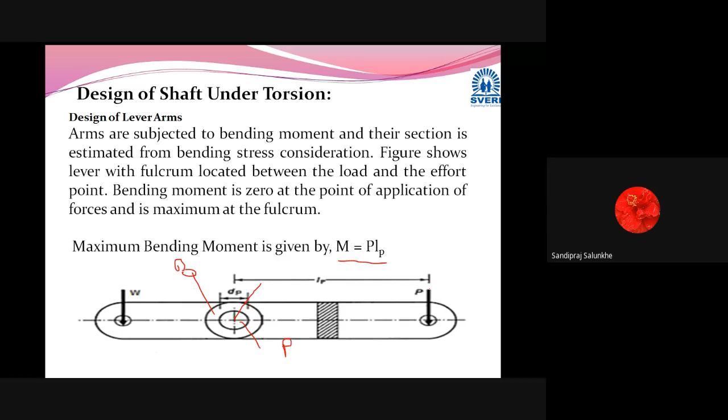If this bending stress is less than the allowable one, then we are going to say that the design is safe, in which this M is nothing but the moment which we are going to calculate, and that moment will be calculated by means of force multiplied by distance. Either this force and this distance we can consider, or we can consider the W multiplied by whatever may be the length of the W.

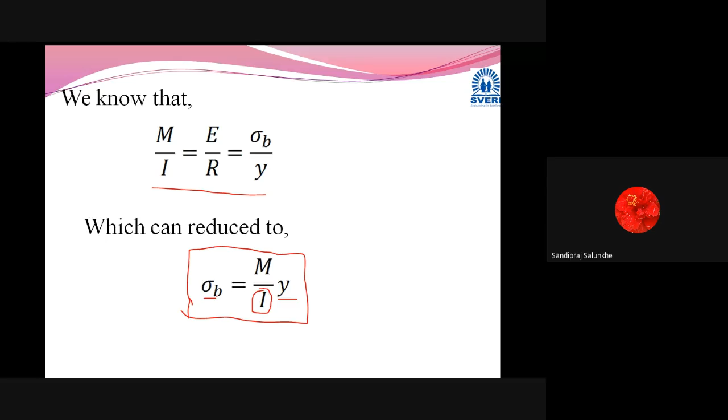And I is the moment of inertia of the cross section which we are going to consider for the lever. Already I think we have discussed which type of cross sections are used for the lever, and what are the equations of moment of inertia for that lever. Also, we know that this y is the distance of the uppermost fiber from the neutral axis of that lever. So by means of this, we are going to calculate sigma b, that is the bending stress, and we are going to check whether it is in limit or not for the lever plate, right?

This slide we have covered. Now for this slide, what we are going to consider is the values of I and Y for the selected section, that is nothing but the previous slide which we have seen. Out of this, you can choose any one section which will be given in the problem statement, rectangular or elliptical section or I section also, or it depends upon the designer, who is going to choose as per the requirement of the load or the duty of that lever, we can say heavy duty, light duty, or middle one. Depending upon that, we are going to select the cross section.

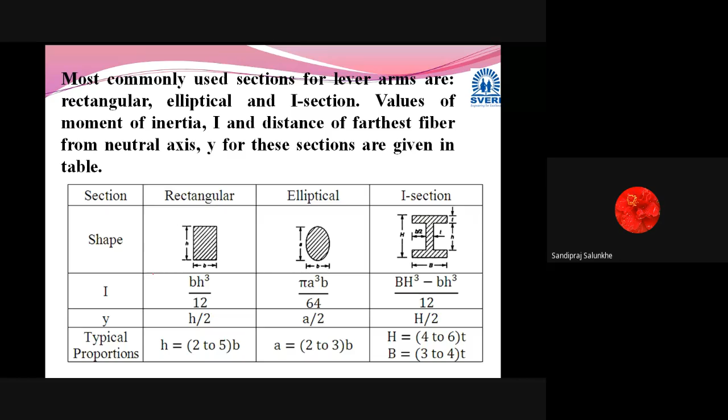So when we are going to take the suitable cross section, then this value of I and Y for the selected section is determined, and afterwards it is used for the calculation, so that the bending stress will remain within the allowable limit. By means of this I, that is moment of inertia value, and Y value, sigma B is checked whether it is within the limit or not, and if not, then we have to choose the higher dimension.

Okay, then normally when we are going to select these lever arms, when we are going to put this boss in between the fulcrum pin and the lever arm, as we are going to drill a hole there, this area is going to become weak, and as this area becomes weak, we have to strengthen it, so that the lever arm will sustain the load.

So what method we are going to use for that? Here you can see that this is the thickness of lever, we can mention this as a thickness T, but at the point of fulcrum this thickness has increased. Are you getting it? And this additional area, this one, and this one, is going to provide more strength at this point where the hole has been drilled in the lever. Okay, this is one method.

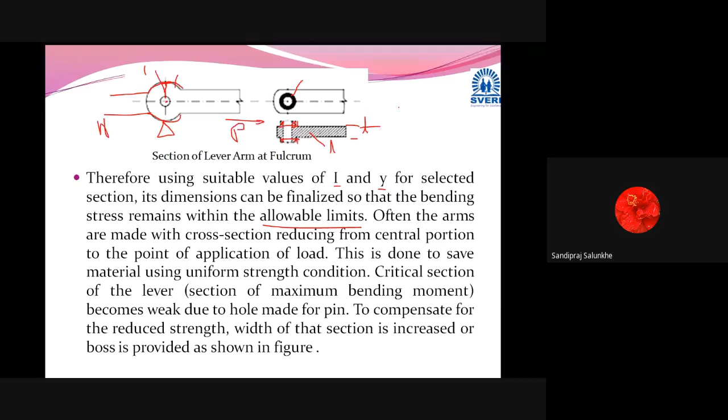Okay. Other way, you might have seen that, and here the fulcrum is used. You might have seen such type of levers. This is the effort side, P which you are going to apply, and this is the external load side W, and this cross sectional area is increased here, so that whatever stress concentration has taken place because of the drill which we make in the lever arm will get compensated with the additional area. And this is going to take the bending moment or the bending stress which is generated in the lever.

Okay, because you can see here that the maximum stress will be generated at this point only, point of fulcrum, rather than the other part of the lever. While we are solving problems, we will come to know how to decide the dimensions of the lever at the point of fulcrum, as well as the length of that lever. Length is decided by means of the leverage principle and the formulae which we have calculated. Important thing is how to calculate the reaction at this point, because further for the designing, we are going to take this reaction at this fulcrum point. Okay, this is what this slide is explaining.

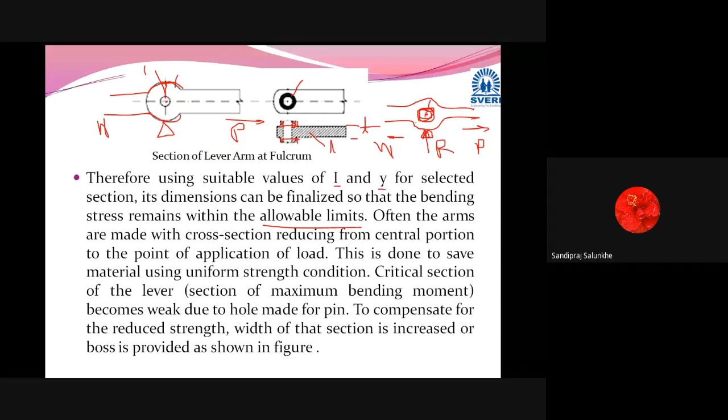Okay, the main part of this lever is design of fulcrum, because once you are going to design that lever arm, you can select the cross section and you can choose the dimensions for that lever arm. The only important calculation is how to calculate the reaction at the fulcrum point. Also, you know that applied effort multiplied by its distance is equal to the external load multiplied by the distance from fulcrum of that load.

So from this you can calculate moment, and from the moment you can use the equation M by I is equal to sigma b by y. If you select the cross section, I can be calculated and y also can be taken. This M is calculated as P multiplied by distance from the fulcrum of that P, or W multiplied by distance of that W from the fulcrum point. By this means you can decide the dimensions of that lever arm.

Now, the important point is when we decide the dimensions of this pin. Can you give me some hint where we have designed such a type of pin in a previous design procedure? In the knuckle joint, sir. In knuckle joint, right? In case of knuckle joint also, such type of pin we have designed, where double eye section and single eye section we have seen.

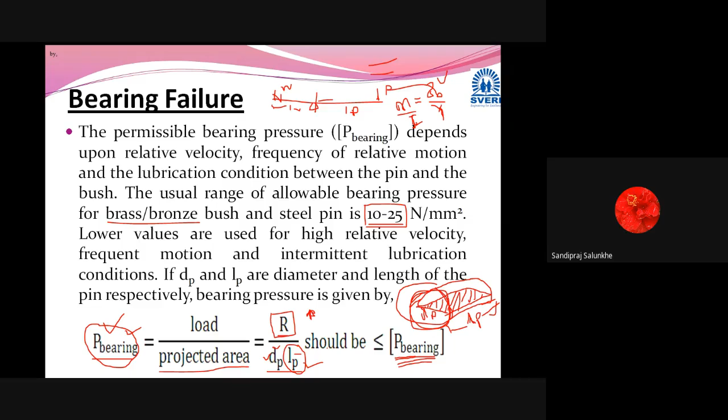No, sir. Hmm. No doubt. Okay. If you have any doubt, you can write in chat box or we'll move further. Shall we go?

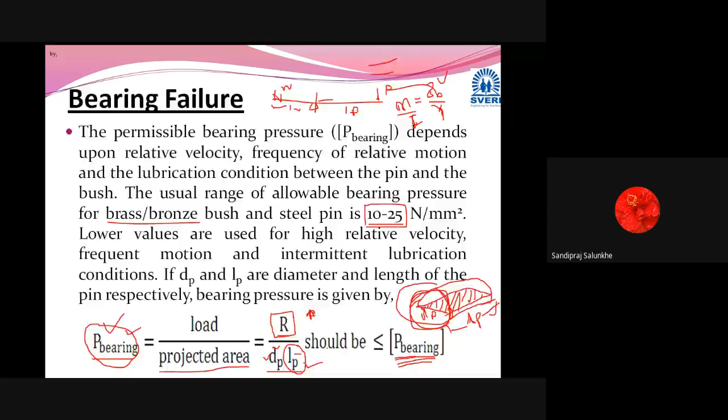Okay, now we'll go to the normal consideration, that is the failure of that pin. And we are going to calculate the dimensions of that pin. If we are going to select that dimension of pin, then we are going to check whether the shear stress which is generated in that pin is less than the allowable shear stress of that pin material.

What it means. Now here we are going to consider this pin is subjected to double shear, as already we have seen in the diagram. At this point and at this point, shearing is going to take place, and we are going to consider the cross section of pin is circular, with the diameter of this pin as dp, right? So we know that stress is equal to force divided by cross sectional area. Now the force which is coming is definitely the reaction which has been provided here at the fulcrum, which we can calculate with the formula which we have derived. This is the force situation.

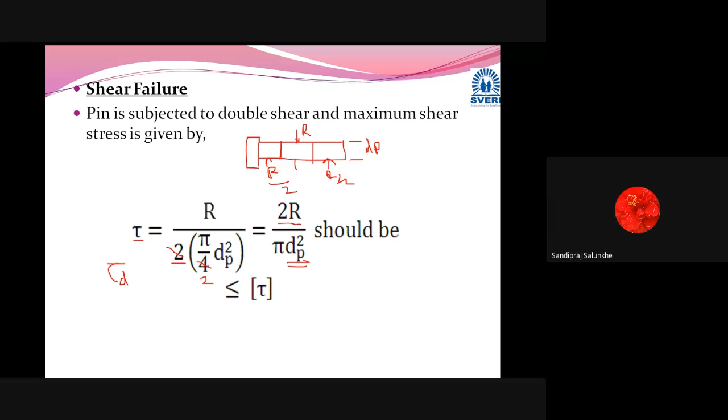So first criteria which we are going to consider for the pin failure is the shear failure. And second criteria, as we know, is the bending failure of that pin. Now, as in case of knuckle joint, the pin is going to sustain the bending load also, and we are going to consider the relative motion between pin and lever. So it will undergo the bending moment, and it is assumed that the load acting on the pin is uniformly distributed. I will erase all the things first and then we will go further.

Okay, now when we consider this pin, we consider that the pressure or force which is acting is uniformly distributed. This is on the upper side, and whatever force is coming at the lever side is in the downward direction. So this uniformly distributed load is acting on the pin, and this pin will undergo bending. While considering the support to this pin, we consider this T by 2. Okay, here it is supported.

And while it is acting exactly at the mid, that is B by 2, we consider that the total load is acting. Total reaction is acting at T by 2, whereas the total external force is acting at B by 2. But from where have we decided this distance? For that we can consider this midpoint. And from this midpoint, what is the distance of this support? That we have to calculate for calculating bending moment. Am I right?

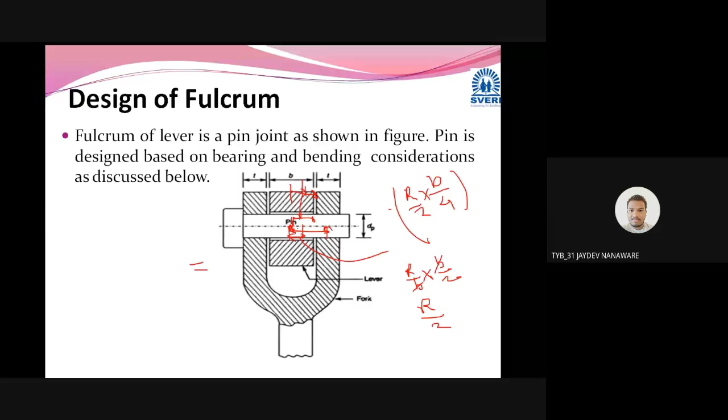ठीक आहे, म्हणजे हा जो फॉर्म्युला आहे हा फॉर्म्युला आला टोटल बेंडिंग मोमेंट, and that is equal to R/2. Just we can simplify this formula, B/4 plus A/3. That will be the total bending moment, and this bending moment is used again in the equation, that is M/I is equal to sigma B

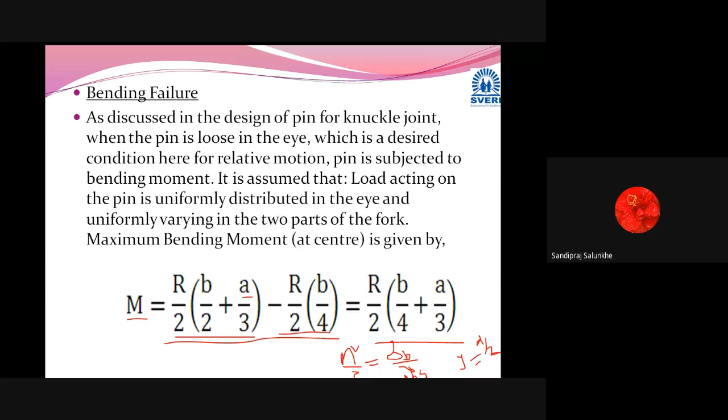Am I right? And once you have calculated this MB, we can calculate the sigma B. हे बरोबर आहे का? Hello, yes sir. Okay. This sigma B value we have to check whether it is within the limit or not. And where this I is calculated as pi/64 dp⁴, y is considered as dp/2. Okay, any question?